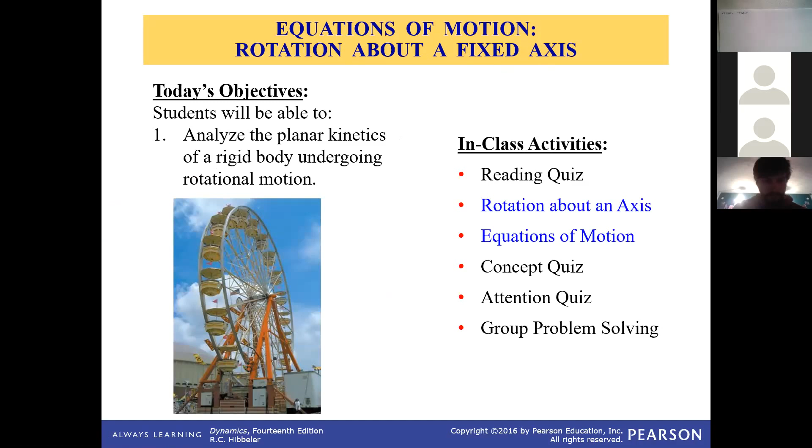So again, we'll be doing a reading quiz first, then a little bit of lecture, and then we'll be looking at concept quizzes and attention quizzes, and then a couple examples, and if we have time, we can do some group problem solving.

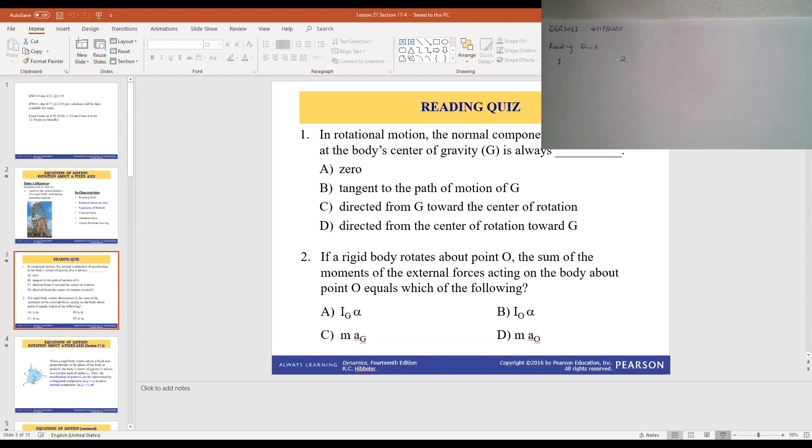All right, so everyone has sent your responses to me already, so let's take a look. The first one says in a rotational motion, the normal component of acceleration at the body's center of gravity is always... The normal component of acceleration should be pointing towards the center of rotation. This is about the center of gravity, so it should be directed from the center of gravity towards the center of rotation. So the first one should be C.

The second one says if a rigid body rotates about point O, the sum of moments of the external forces acting on the body about point O equals which of the following? We are looking for the sum of moments of all the forces about the axis going through point O, so we should be using I sub O, the moment of inertia about point O, times alpha. So that should be B. So C and B for these two.

Now let's look at the lecture part of today. It's pretty easy, this is just about the equation of motion. Last time we mentioned three equations of motion. The first should be the net force in x, if you use the x, y coordinate system. It should be equal to mass times the acceleration in x. And then net force in y should be equal to the mass times acceleration in y. In this case, if we have rotational motion, if the rigid body is rotating about a certain point O, or the axis through that point O, then the most convenient way to set it up is to choose a normal and tangential coordinate system.

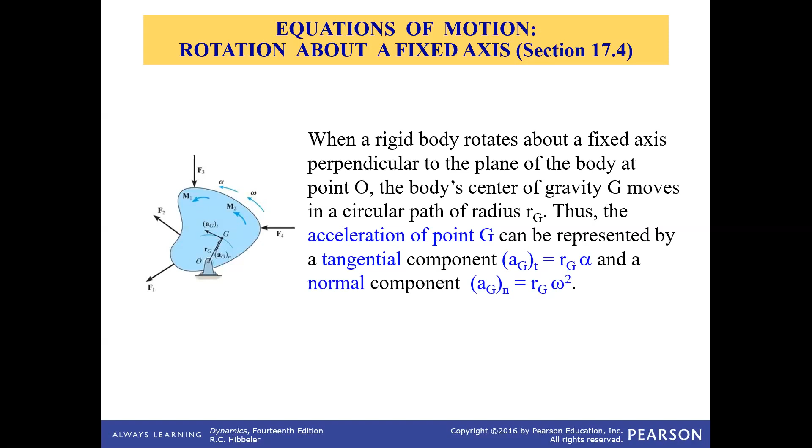If you don't remember it, you can go back there and have a quick review on that.

Now, if we have the equation of motion, these are the three equations of motion we'll be looking at. The first one: net force in the normal direction equals mass times acceleration in the normal direction, which is m r g omega squared. Omega is the angular velocity. In the tangential direction it's mass times acceleration in the tangential direction, which is m r g alpha.

Because the object is having rotational motion, the summation of moments from the external forces, and any applied moments if there are any, should not be zero because this time you have rotational acceleration. It should equal the moment of inertia about the rotation axis through point O, times alpha, the angular acceleration. So in this case, this is not equal to zero.

For I sub O, we can always use the parallel axis theorem, shown on the top line, top paragraph here. I sub O can be calculated if we know I sub G, the moment of inertia about the rotational axis going through the center of gravity, plus m times r g squared, where r g is the distance from the center of gravity to the axis of rotation about O.

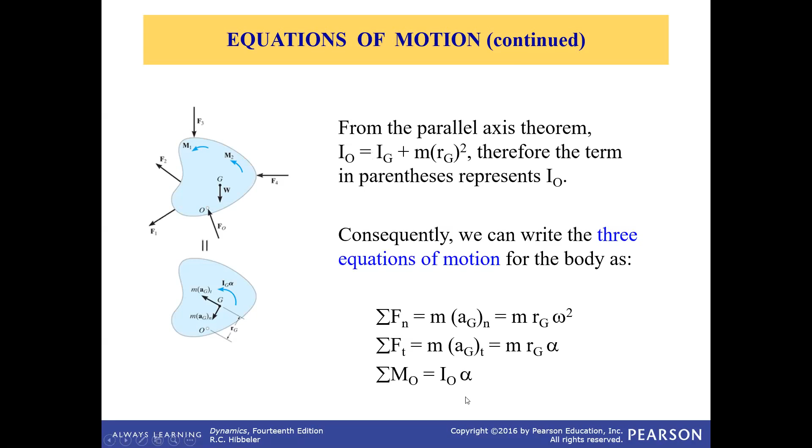So these are the three equations we'll be looking at today, and we'll be using these three equations to solve the problem.

So the procedures for analysis: first you want to establish the coordinate system. Most conveniently, if there's rotational motion, we take normal and tangential directions. Then we draw the free body diagrams indicating all the external forces, and any moment couples on the body.

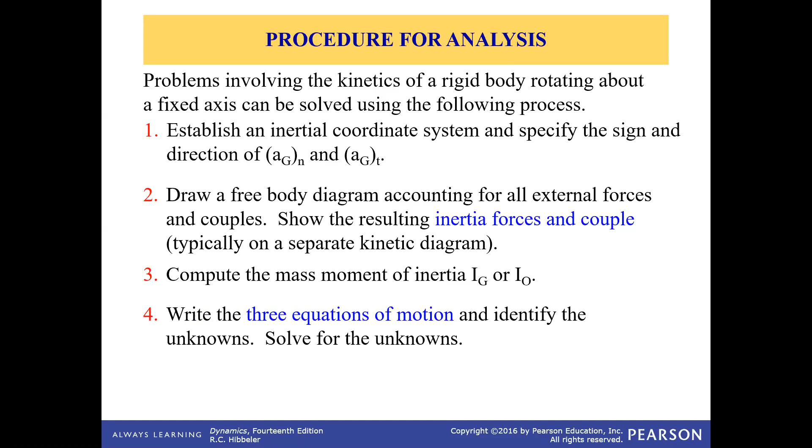Then we calculate the moment of inertia, either through IG or through IO. Then write the three equations of motion, identify the unknowns, and solve for them. Because we only have three equations of motion, the most unknowns we can solve for is three.

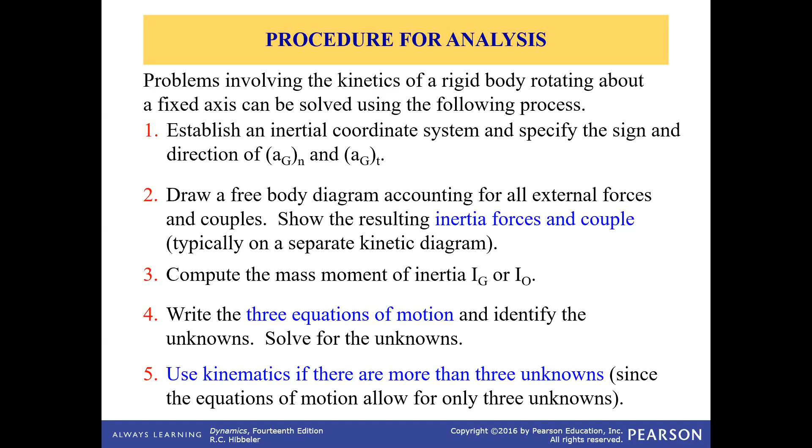And if there are more than three unknowns, you'll probably have to use kinematics to solve for the additional unknowns. So we'll take a look at the first concept quiz here, actually there are two of them.

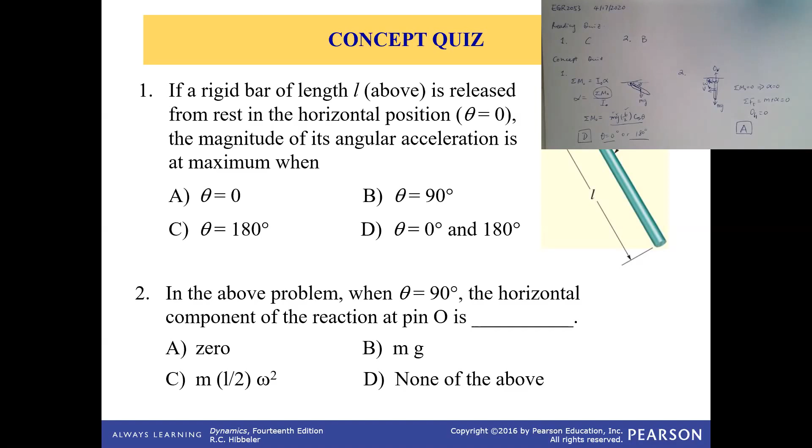I think most of you guys got this one right, but if you still have doubts, just let me know.

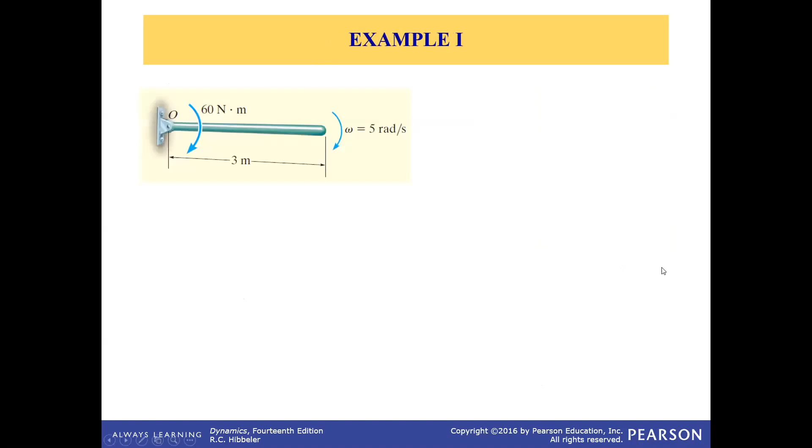Now we'll take a look at a couple of examples. The first one has a rod—not quite horizontal here, but we'll just assume it's horizontal. Imagine this is a 3D figure, so it doesn't quite look horizontal, but it indicates a horizontal position. The rod has a mass of 20 kilograms and is rotating at 5 radians per second at this instant shown. There's a moment of 60 newton-meters applied to the rod, so there's also an external moment in addition to the torque by the weight.

So we'll be thinking about both the moment and the torque by the weight here.

It's asking us to find the angular acceleration alpha and then the reaction at point O when the rod is in the horizontal position.

The plan here is: the mass center moves in a circular radius of 1.5 meters, so the center of mass would be at the middle here. It appears to be a homogeneous rod.

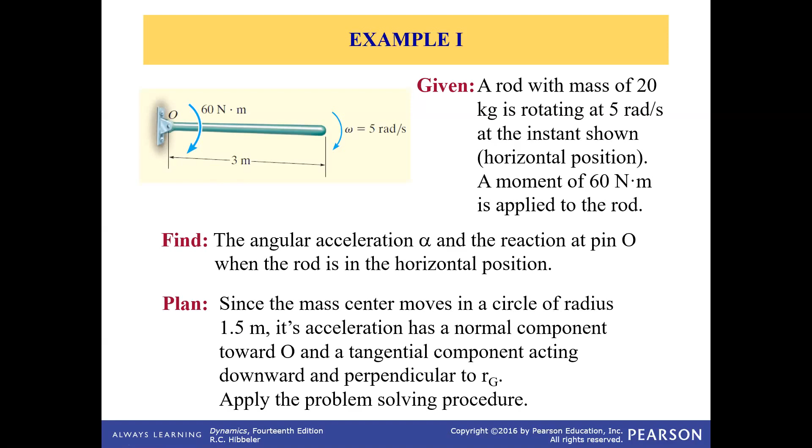Then we can look at the acceleration in the normal component and tangential component, and then we can also apply the summation of moments to be equal to I times alpha. So we'll follow the procedures here.

First, looking at the free body diagram, there's the weight on the rod. There will be a tangential force on the rod at the O point, and then there will be a normal direction force on O here. So these are the three forces.

Now there's an external moment added on the system of 60 newtons times meter, this guy here. So forces and then the moments, external moments. Now this is a kinetic diagram, so you should have a net force related to the acceleration.

That net acceleration can be related to net force: m times the acceleration in the normal direction, m times the acceleration in the tangential direction, and then also the moment. Summation of the moments equals the moment of inertia times angular acceleration. This is from rotational dynamics.

So let's look at the two net force equations. Net force in the normal direction should be equal to m r omega squared - that's normal direction, it's the centripetal force basically, so it's m r omega squared.

We are given the omega, we are given r, we are given the mass, so then this can be calculated. So the reaction at point O in the normal direction is 750.

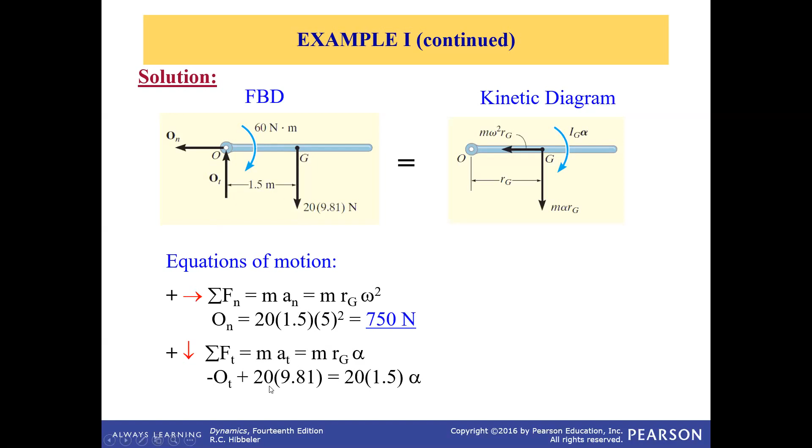So we have two unknowns over here with this equation. The first equation doesn't have any unknowns, so then we'll have two unknowns in the second equation. So then we would need a third equation.

The third equation then will be coming from the net moment equal to moment of inertia times angular acceleration. So there are two moments: one is this external moment of 60 newtons times meter.

A second moment should be the torque by the weight on the rod, so mg times r, that gives you the torque. They are both in the same direction - they will both make the rod rotate in the clockwise direction.

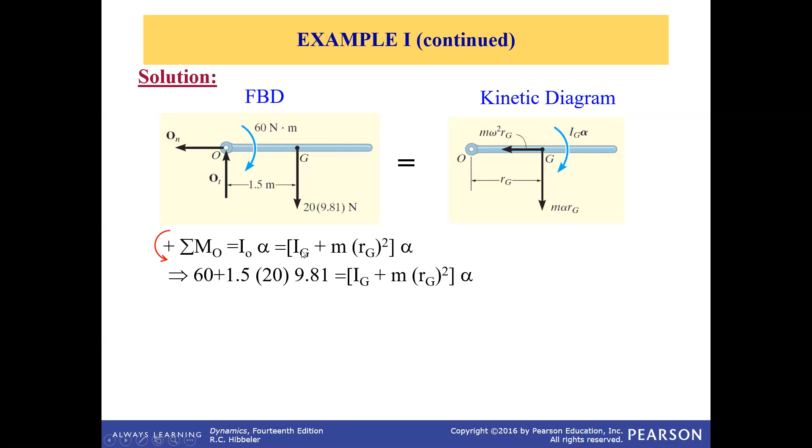If we pick that to be the positive direction, then we just use the positive sign. Should be equal to IO, which is equal to IG plus m times rG squared. This is based on the parallel axis theorem. For the moment of inertia about the O axis should be equal to moment of inertia about G plus m d squared, where d is rG.

For a rod, homogeneous uniform rod, IG, moment of inertia about its center point, center of gravity, is equal to 1/12 of m times the length of the rod squared. And then rG is equal to half of the whole length.

So then we can plug those into this expression. This is the IO: this is the 1/12 m L squared, plus you would have 0.5, which if you square gives you 1/4, m L squared.

Or if you know that for a rod, a homogeneous rod, rotated about one end, it's just 1/3 of m L squared - you can just use that one if you know that.

So you have your alpha, then take alpha into the equation from the previous slide, where you have both OT and alpha as unknowns in that equation. If you do the substitution of alpha back into the equation, you can solve for your OT. So then you got your OT to be 19 newtons, and alpha to be 5.9 radians per second squared.

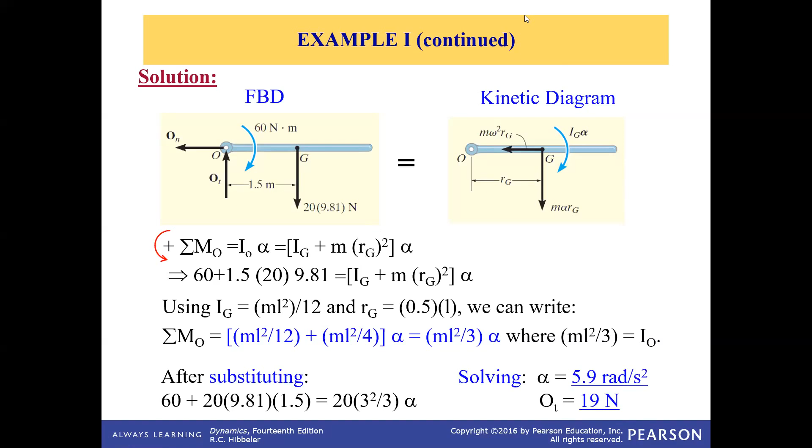All right, so if not, then we will take a look at a second example here.

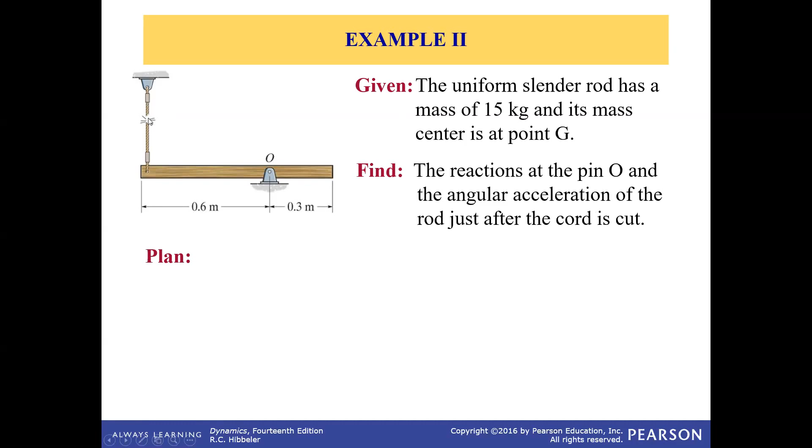So the second example here gives you again a rod. Uniform rod, the mass is 15 kilogram. The mass center is at point G, should be somewhere midway on the rod. You want to find the reaction at point O, and the angular acceleration of the rod just after this cord is cut. Point G is indicated now.

So if this is cut, we can imagine the center of gravity will be rotating in that way. The distance from G to O, we can figure out because the whole rod is 0.6 plus 0.3, which is 0.9. From one end to the center of gravity should be half of 0.9, which is 0.45. Then from G to O, that's 0.45 minus 0.3, which is 0.15. So that's the distance from G to O, radius of 0.15 meters.

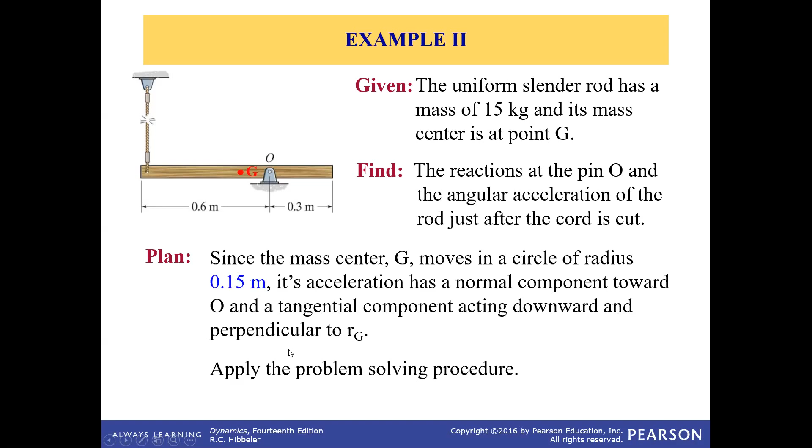All right, so we'll again apply the procedures for analysis. First we'll set up an NT coordinate system. N goes from G towards the rotation in this direction, and this is the T direction, or actually the T direction should be going downward. We can take that as positive T.

We can draw the free body diagram on the right here. There will be this weight, then reaction forces in the tangential direction and in the normal direction. This is in the negative tangential direction. The kinetic diagram we could have is mass times acceleration in the normal direction, mass times acceleration in the tangential direction. Then summation of moments should give you an angular acceleration.

So I sub G times alpha should be the summation of moments. All right, so we can write those three equations.

The first equation is in the normal direction. In the normal direction, there's only one force, so that's ON. At this particular moment, when you just cut the cord, the angular velocity should be 0, and then it starts to increase. So at this very moment when it's just cut, omega should be 0, so ON should be 0. You're still at the horizontal position, so ON is 0.

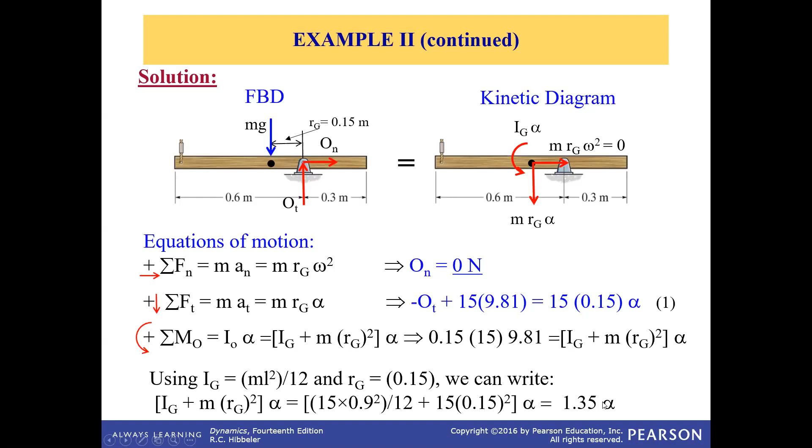Then we can figure out this term in the square brackets. I sub O: I about G, midway in the rod, should be equal to 1 over 12 m L squared. R is 0.15, so we can calculate that. M is 15, L is 0.9, divided by 12, plus the mass times R squared. So it's 1.35 times alpha on the right hand side.

So then we can use that to solve for alpha. After you do the math here, alpha is going to be 16.4 radians per second squared. Then put alpha back into equation 1, the second equation, and you can solve for OT. OT turns out to be 110 newtons.

Any questions you guys might have?

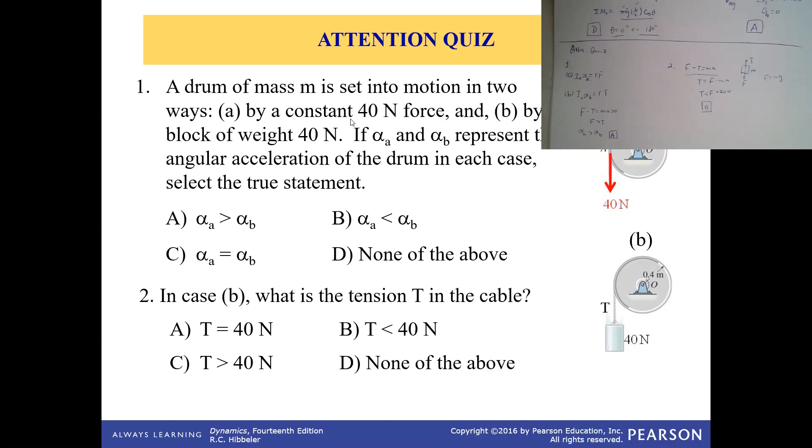Any questions you guys might have before we head to the group problem solving?

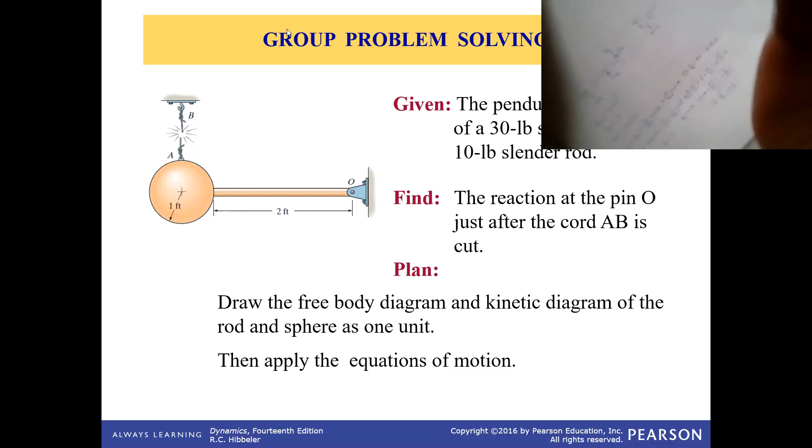So any questions you guys have at this point for today's class?